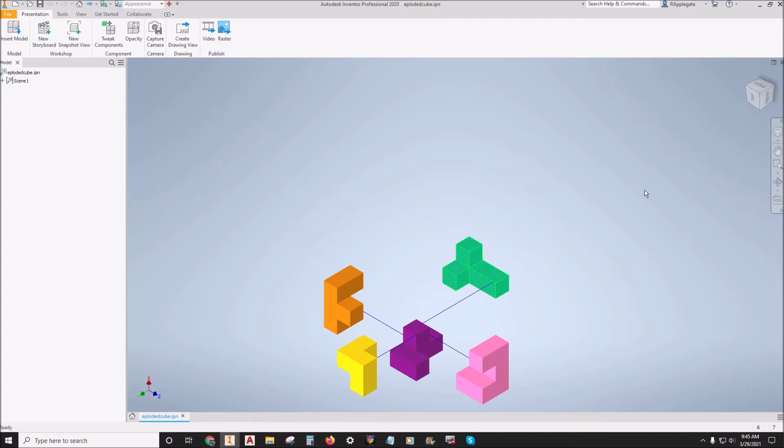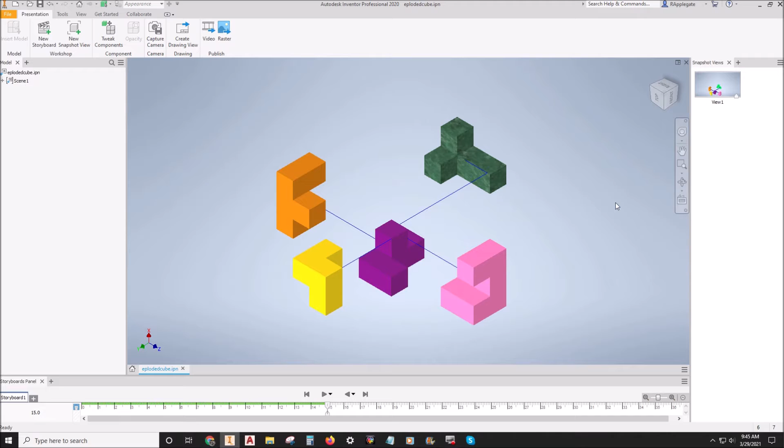I'm going to pull up two different files. This is what we want it to look like, so we want to save a file that looks similar to this. And then we also want to see the IPN file where we've pulled the components apart, leaving our base one there. So the one that we start with on the table would be here, and then we add our other components to it. So how do we get to that?

Close that file. And what I'm going to do is open what's called a presentation file. So I'm going to make sure that I'm in the file project that I want to be in, where all my parts are stored, and I'm going to actually open a presentation file.

When you get this blank screen, you're going to import your assembly from that project. You should be in the project folder, and you should only see one assembly in there. If you have multiple assemblies, you would have to choose which one you want. I'm going to pop in my cube.

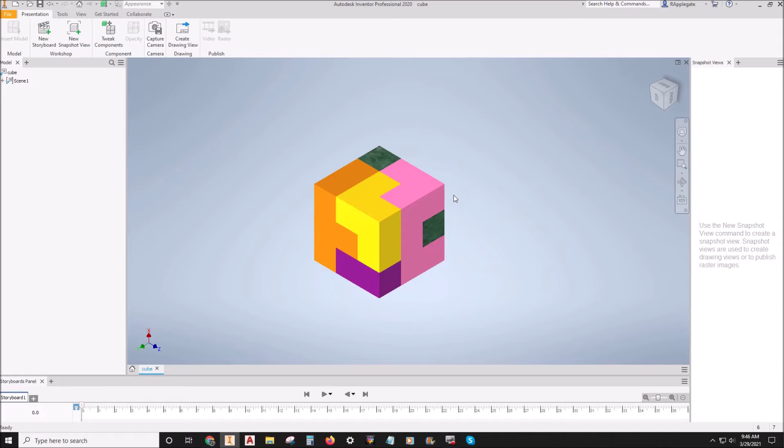And I'm going to kind of center it. I want to be able to see it in a relationship where I can anticipate the parts coming out. So I'm going to just zoom out just a touch, and I'm going to start pulling it apart.

Now, keep in mind that when we pull our parts off of this, we want to do it in a fashion that, for instance, this orange part, I can't just go straight up, or this section here would go through that yellow cube. So I need to keep in mind of how logically we can pull this apart and still maintain the integrity of not looking like it's going through or ghosting through another part.

So how I'm going to do that is I'm going to go up here, and we've got kind of a storyboard at the bottom, gives you in seconds of what's going on. And I'm going to tweak components. So again, if we hover over it, it kind of shows you what the deal is. We're pulling stuff off of the assembly.

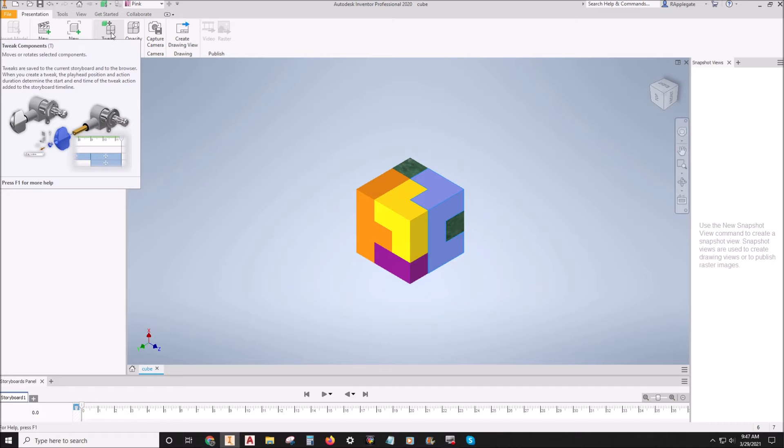So I'm going to select tweak component, and then it's going to say, okay, what component do you want to tweak? In this case, I'm going to start with this orange one back here, and I'm going to pull it straight back this way. So I'm going to click on that part, left click, and now it gives me this UCS icon.

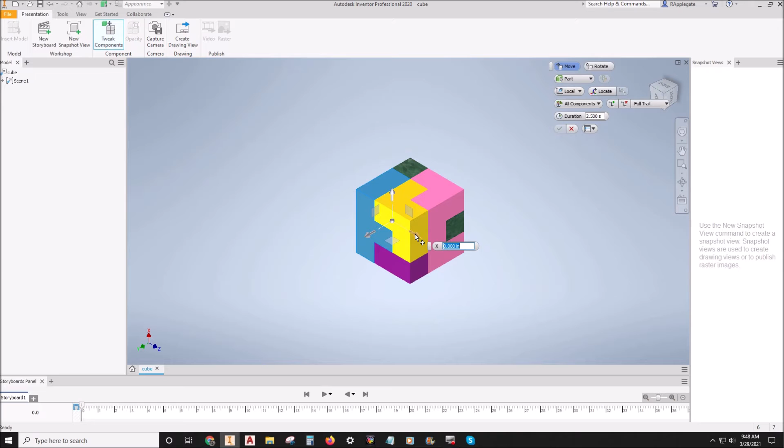I want to go back this way, but the arrow is pointing this way. I can't change that axis, but what I can do is select the right direction, the linear direction, and give it a positive or a negative number. I'm going to try just -2, see what that looks like. That's pretty good, that takes it off the distance. Let's see what -3 looks like. That's even better. Maybe -2.5. Okay, so that's how we move it off of the object.

Now, once it's off the object, you can move it in other directions if you want to. You can pull it back out this way, you can go another direction, you can even do rotations. And we'll take a look at that in a second.

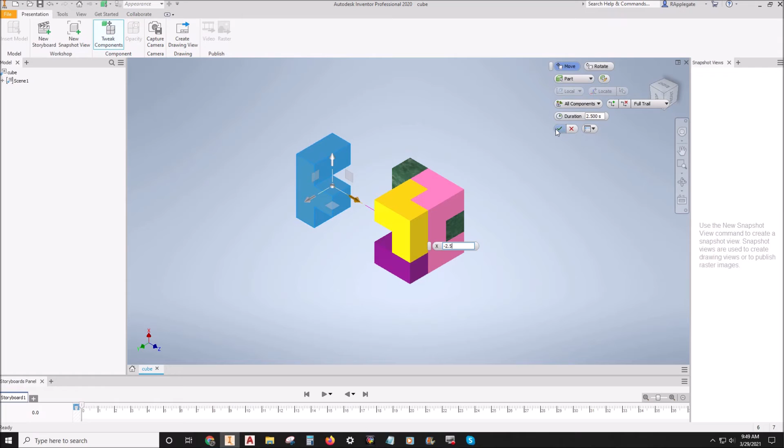So now that I've pulled that one off, let's go and select this one. But before I do, I need to finish that part. So I'm going to hit OK or Enter, and I'm going to go and tweak my next component. In this case, the arrow is pointing exactly the direction I want to go. I want to come down and to the left, so I'm going to go -2.5. Oops, I don't need the negative.

2.5. Let's go 3. Okay, that's fine. And I'm going to finish it. I'm going to tweak the green one out that's back there. Tweak.

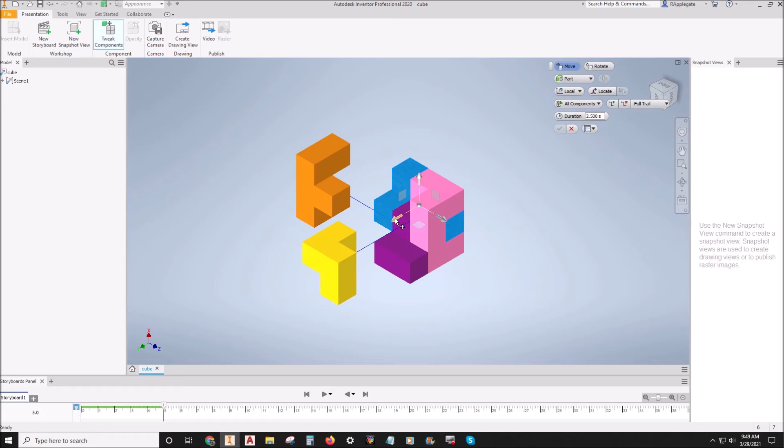Select it. I want to go in that linear direction, but now I need to go negative, right? Negative 3. Okay, and the pink one. You can either select the part or the tweak first, but you have to make sure the part is selected. And we're going to come off of that 3.

So now they're all separated. None of them are touching each other. This one up here is a little bit close, so I'm going to move that one up a little bit. But before I do that, I just want to show you the rotational constraint.

So I've moved it 3. I'm good. Now I'm going to do a rotational constraint. So the 3 is good, it's already pulled out. I can hit that. Let's do the rotational constraint.

Rotate. And let's just go, we'll go 180 degrees. Let's go 270, see what that looks like. There you go. And finish.

And I'm going to pull this one up just a little bit. Add another tweak to it. Pull it up. And you can play with this. I just want you to do a basic tweak on this, on the one that you turn in. But have fun with it. You can pull it up, spin them around, move them in and out, whatever you want to do.

The more tweaks you do, the longer the video is going to be. So just keep that in mind. So let's move this one up 1 unit. There we go. And hit OK.

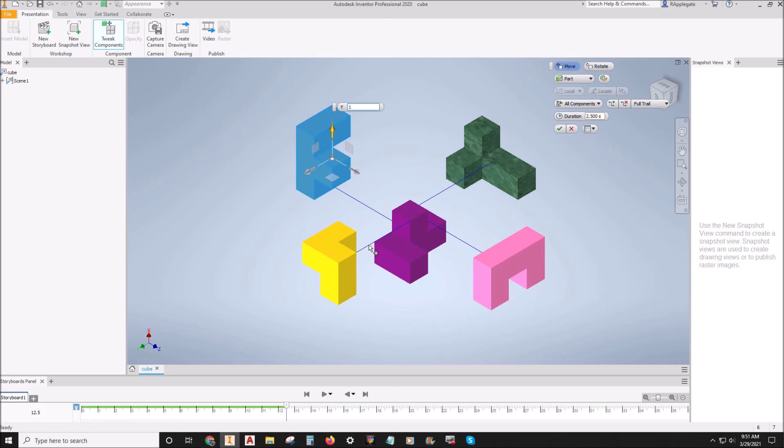Now the units that I'm moving are in relation to the unit size. So these are all an inch, inch and a half. The unit size is all going to be an inch, inch and a half. If these were built in feet and you were only moving 1 inch, you wouldn't see that much difference in movement. But anyway, so here we are.

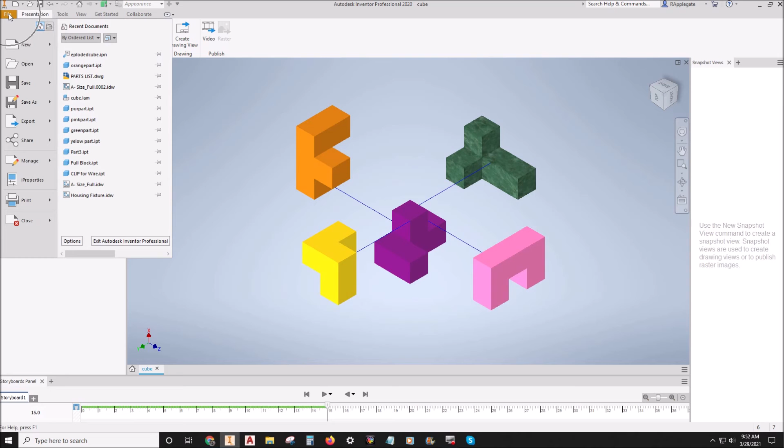We have our exploded view. Now we need to go to File, Save As. I'm sorry, I didn't want to do that. I'm going to go File, Save As, Exploded View. Right. Save.

Now we can move on to the next one. So that's doing an IPN file. Now we can play this, have it pull it apart. Or we can play it in the reverse direction, having it put itself together. Or you can do both.

All right, so there we have it. We could copy that and add it again and play it over and over, or we can do a video. We can make a video where it does it. In fact, we can click on that. If we go video here,

set it up. You usually want to do a WAV file, WMV file. You could do an AVI file, whatever works for you. If you have Windows Movie Maker or something like that, the WMV file is better. If you're using most standard video players, then the AVI file might work better for you.

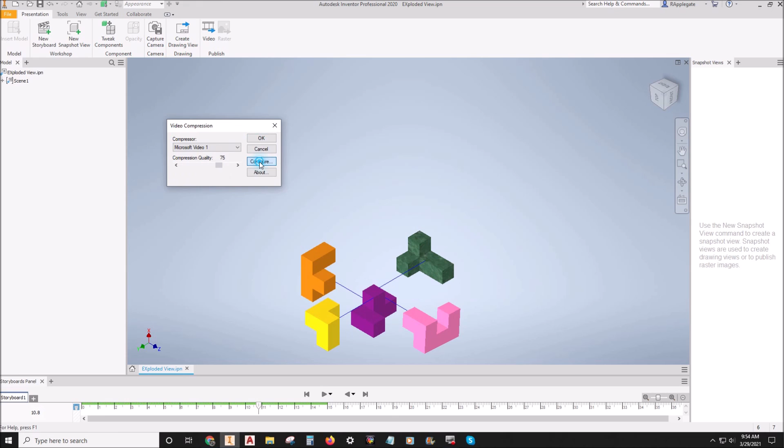So just call it whatever you want to, hit OK, it's going to record it. I usually do it in a Microsoft Video, hit OK. Quality can take it to about 90, and go OK. And what that's going to do is it's going to actually create a video for you in a video format that you could post to YouTube or whatever you want to do.

I'm not requiring you to do that for this. I just want you to get the exploded view. But that's how you would do it. It's going to publish that video, and it's going to ask you to save it. Where do you want to save it? It's going to save it in your drive or in your project folder.